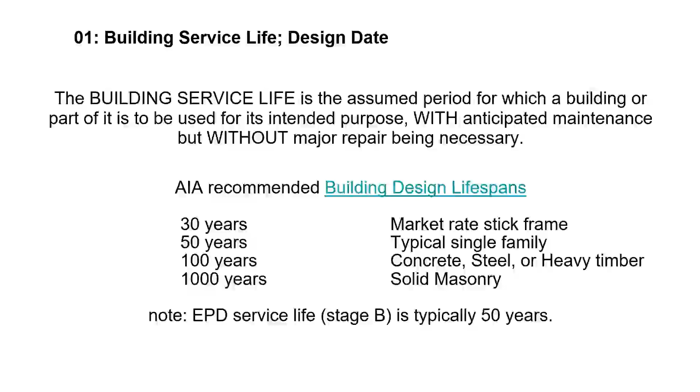Next, please. And in the form, item 1 is the building design service life and design date.

So next, please. The goal of step 2 is to understand at the most granular level possible which climate-related and other hazard risks are most likely to impact your project during its service life.

Many jurisdictions have local hazard mitigation plans or disaster risk management plans that will tell you what the local climate-related hazards are. In California, these are typically available at the regional, state, county, and municipality levels.

Also in California, all our municipalities are required by state law to have a climate change action plan, and that will definitely include projected climate change hazards in that municipality. Local utility districts, transportation authorities, and even school districts often have their own plans as well.

Many of these plans have been legally adopted by local authorities having jurisdiction, so they're actually part of project code compliance. Sometimes building officials are unaware that these plans contain legally required resilience and adaptation features, but that doesn't relieve us as building professionals of the responsibility to know what these requirements are and to design to meet them.

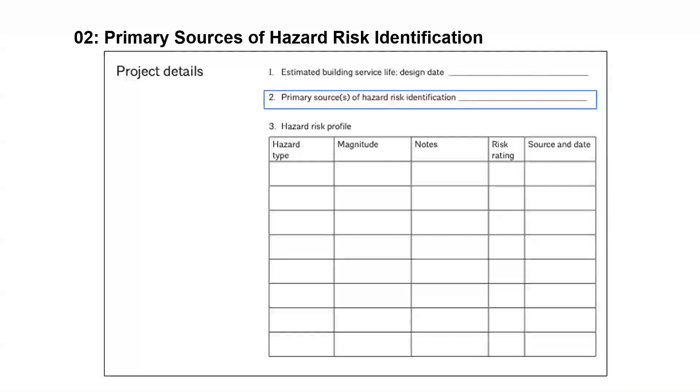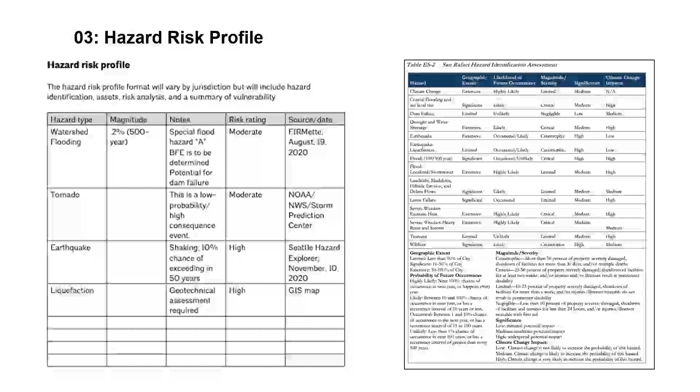Next, please. The AIA guide lists the natural and human-caused hazards to identify for your project, which include but aren't limited to atmospheric, climate change, geologic, technological and anthropogenic, and biological and pathogenic.

Local hazard mitigation plans typically also include the following information: scenario associated with each risk, for example, 500-year flood, probability of the future hazard event occurring, more about statistical probability in a minute, expected frequency of a given hazard event, guidance on the impact or consequences to your project, including cascading effects, the risk rating.

This summarizes the vulnerability by ranking the hazards according to impact, probability, warning time, duration, and cascading effects, and the source and date of the documents that provided this information to the plan. For example, an IPCC report, NOAA, state data, etc.

The resources hyperlinked in the AIA guide are helpful to use in addition to these local plans. They may identify a very real hazard that isn't reflected in local plans. Extreme heat is the one I most often see omitted from local plans, even though most of the United States is already experiencing this, not next century or next year, but now.

The key point is, local hazard mitigation plans provide excellent information on climate-related risks, but as a design professional, you also need to leverage other science-based tools. And unless your project is in a polar region, you probably should design it to accommodate extreme heat. Next, please.

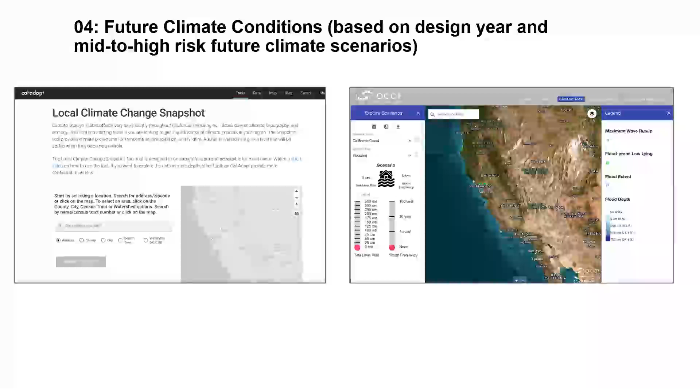On the left, a resource from the State of California, CalAdapt, which covers a number of climate change impacts. On the right, Our Coast, Our Future, which maps sea level rise at a granular level along all of the coast. The key point here is, as a design professional, you need to know how the climate is likely to change over the course of your project's design service life.

In the form, item 4 is future climate conditions.

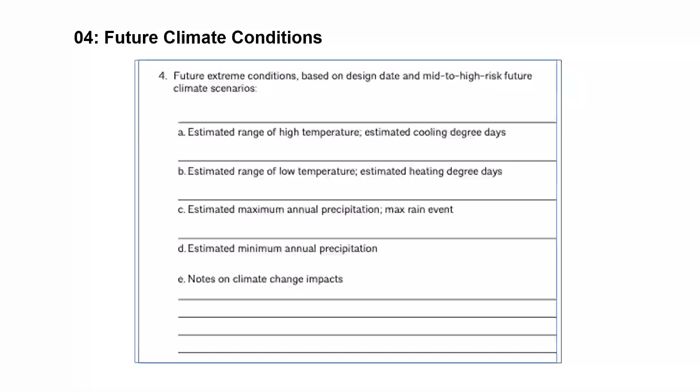We want to emphasize that you should make clear to your client they've been told what the project climate risks are. If AHJs don't require design and construction to adapt to the future climate, and your client decides to ignore future climate because the code doesn't require them to build to it, you want to be on record that you warned them of potential issues.

In the form, item 5 is the project resilience performance requirements.

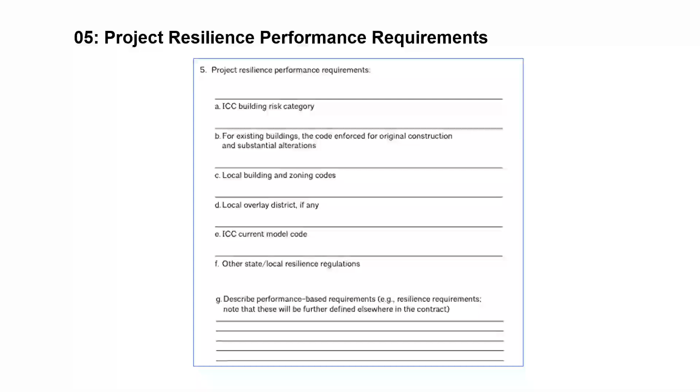The next item in the form is project team acknowledgements. Here, everyone on the project team signs to show that they participated in the risk assessment and understand implications to the project.

Item 7 is just additional notes you can add in your form.

Now Erin will show us how to talk with clients about resilient design strategies and establish priorities to address the risks you identified with the guide.

Thanks, Gail. Now that Gail has shared the AIA tool, I will take some time to briefly share how we at David Baker Architects are approaching these conversations with clients in terms of tone, timing, and our process to set and track these project-specific priorities and mitigation strategies.

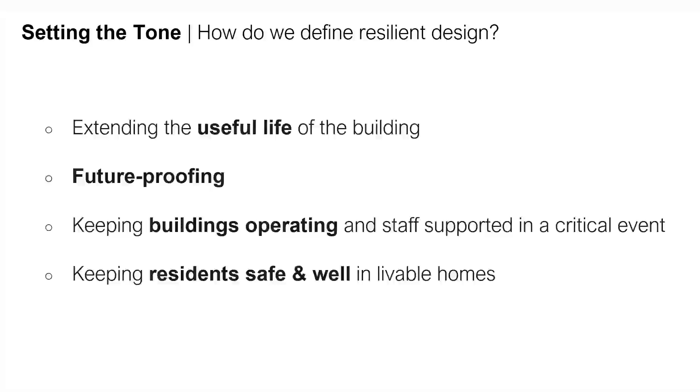This is really an opportunity to find values alignment with clients that's going to support key decisions and investments to create resilience, which you want to establish as early on in the project process as possible. In our office, we're doing a lot of housing, so we like to talk about this in terms of people and operations and things that are really relatable for clients about their buildings.

It's really important to talk about these resilience issues as early as possible, and then to continue these conversations throughout the design process. We're often handed sites and programs that we make the best of as architects. So I think the challenge to us is to find more opportunities to be involved as early as possible in feasibility studies and site analyses when we can, and make sure those analyses are happening right up front, that you're talking early on about mitigation strategies, and able to track that through into design decisions, consultant coordination, getting those into bid documents, and then making sure those are realized throughout construction.

Any project is going to have unique strengths and vulnerabilities. Gail talked a lot about that process in terms of the AIA form, but just making sure you are using data, science-driven, future-looking data, and maps as local as possible, just to reiterate Gail's points, that helps prioritize these risks and align on the goals with clients, and make sure you're giving visibility to all of that.

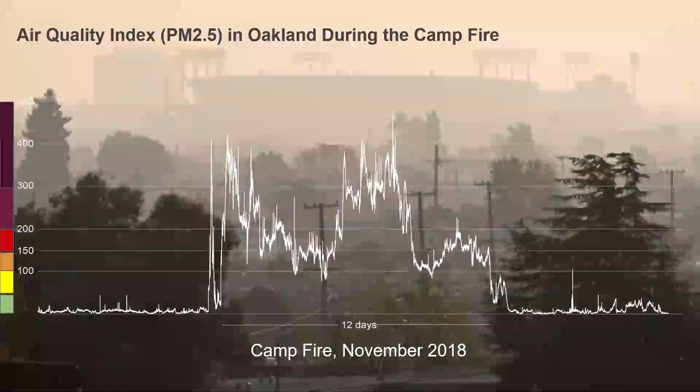Often we find that clients have a really strong desire to prioritize whatever events are most fresh in their mind, so they're looking to recent experiences. For example, the Orange Sky Days that we had in 2018 following the Camp Fire, every client meeting people were talking about air filtration, and then that goes away for a while and people aren't asking for it as much. Fire resilience in California is likely going to be the buzzword for the rest of this year. But we want to make sure we're not just reacting from an emotional standpoint about the most recent, and definitely not looking just to past data, but really looking ahead and having those conversations about likelihood.

Which is why the process of mapping vulnerabilities is really critical. There's so many resources out there. I think Gail did a good job of sort of simplifying that, but there's really tons of information, tons of data out there, and the goal is to find reputable sources that are as site-specific and future-looking as possible, to get beyond those sort of personal, emotional experiences.

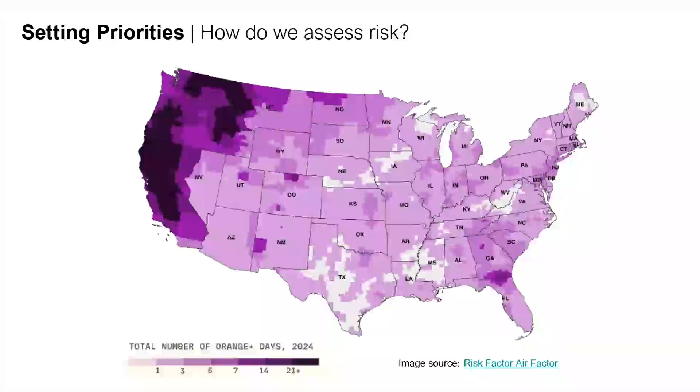Because there are so many resources, I've been part of a group through the Building Green Peer Networks that's been working to collect a crowdsourced centralized database of resources. We have been in conversations with AIA to figure out hosting and maintaining this long term. But right now it's just all of us putting the things out there that we are finding and vetting them as a group. This is available via the link that's posted here. There are location tags, there are types of hazard tags, so it can be a helpful way to sort of crowdsource and share ways to get more local data.

Here's a link to add to that database if you're interested. If you have something that you're not seeing on there that you're personally using, we are still in the crowdsourcing phase trying to grow this database to help people find the most local resources available.

As you begin these conversations, just a reminder that it's important to establish the scale of the resilience measures that you're trying to achieve with the client. For us, in housing, we're focusing on what are we trying to do at a resident level, a common area level, and then would there be opportunities to connect beyond the site?

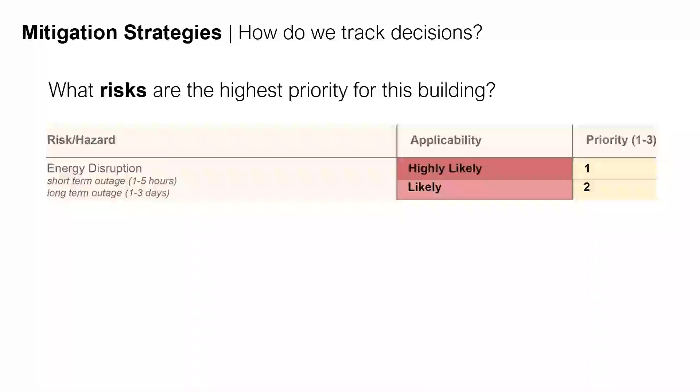Before this AIA form came out, we had been developing a matrix that's helpful to facilitate and track these conversations around likelihood and priorities, which could also be done with the form, but just that concept that you're documenting and sort of establishing that up front.

Whatever documentation you're using, it's a central and shared location for the project team to track the status. As these conversations go on over the life of the project, you're able to say what's included, what's under consideration, what's not included, and have some notes about what you're doing to address the prioritized risk.

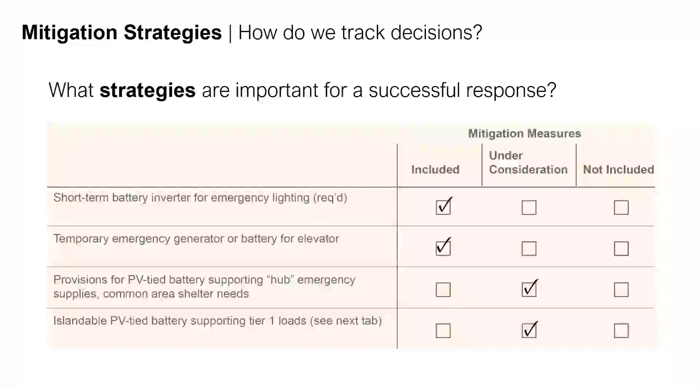One of the most important things we've been learning in our conversations with clients is that they're really the most productive when you talk about resilience in terms of human experience, needs, and behaviors, and it takes the big picture idea and makes it much more relatable, especially as you start to talk to service providers and maintenance staff, talking to them about their experiences and their needs, and the needs of the people they're working with really makes this a much more relatable conversation.

It can also be really helpful to track the various incentives. There are some out there right now, and more being developed, but ways that can reinforce funding applications and insurance, and there's going to be more case studies that talk about that as well. That is all for me. Thank you.

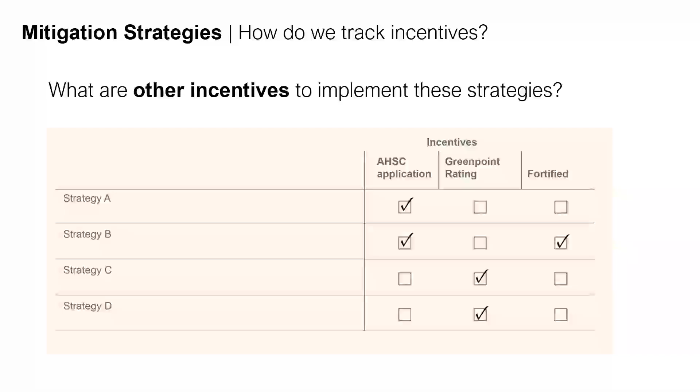Hi, everyone. I'm going to give a brief run through of the Resilience Design Toolkit, which HKS co-published with AIA National and collaborated with the AIA RAD-AG. As noted, our team gave a full presentation on this as the first part of the series, so I'll do my best to give a brief summary. I just put a link in the chat if you would like to follow along.

As most of us know, the building code represents the minimum performance requirements a project must have to be built, and it seeks to provide a building that protects the health, safety, and well-being of users in hazard egress events, but does not ensure the building or structure will be usable after the event. A beyond code building must look to the future and anticipate potential changes in social behavior, technology, and climate to enable the building to remain relevant and safe over time.

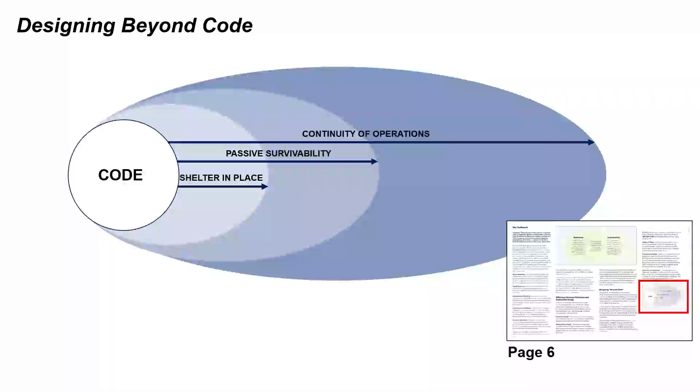So resilient architecture focuses on creating buildings and urban spaces that can continue to function and provide essential services during and after disaster events. So how do we get there?

Our team developed the 5 forms of resilience to communicate a comprehensive approach for resilience thinking, which includes social, health, economic, infrastructure, and environmental resilience. Together, these concepts provide a framework to assess the level of resilience of a place and reveal potential gaps where attention is needed.

The toolkit was developed through internal research and the evaluation of the wide breadth of tools, processes, and rating systems available to inspire resilience in the built environment. There are plenty of tools out there, but none truly address the architecture design process in detail. So we created our own and specifically crafted it for architects, interior, and urban designers.

The 5-step method embraces the standard approach for architecture projects used in the AEC industry, which allows the process to be flexible, agile, and able to accommodate any type of project.

So where do we start? Step 1 in designing for resilience is to define the resilience scope of the project. This may already be embedded in an RFP, RFQ, or it may stem from a conversation or meetings with clients and stakeholders. During your interactions, you will likely notice the knowledge level regarding resilience of a client, and that can help determine how to continue.

Step 3 is all about identifying the hazards pertinent to the site and project and how to assess their impacts. The key component of determining risk and vulnerability is exposure. We use the probability of hazards occurring and the magnitude of losses from those hazards to calculate the risk, and we can do this through the formation of hazard asset pairings.

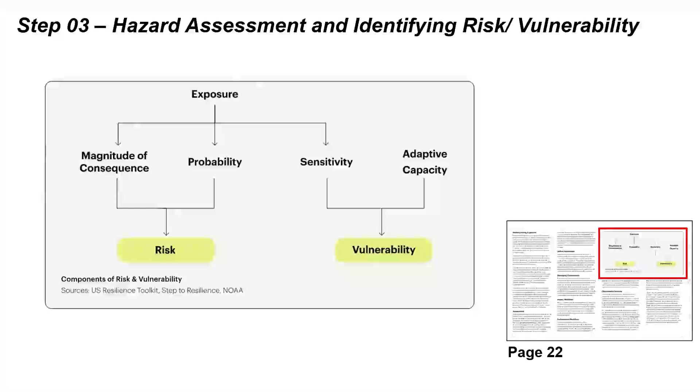Here we assess potential hazards that Gail brought up for the site and the associated impacts of the project assets. This process reveals which hazards are most important to account for in the design.

Once a hazard has been identified as a potential threat to the project, we then analyze it to determine its critical impacts. This chart shows how we consider the hazard's primary and secondary impacts to the site, building, people, and surrounding areas to identify key components for the project team to develop solutions for our next step.

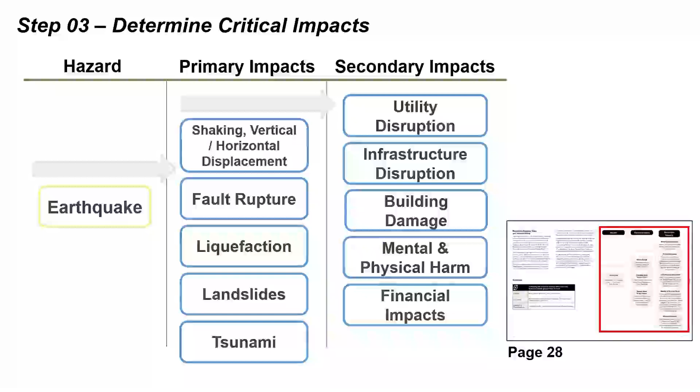Step 4 is where hazard assessment results from step 3 come in and connect them to design strategies of the project. During all this, there's a lot of information to consider, so it's really beneficial to incorporate the AIA framework for design excellence into the design process to help coordinate concepts across all 10 measures.

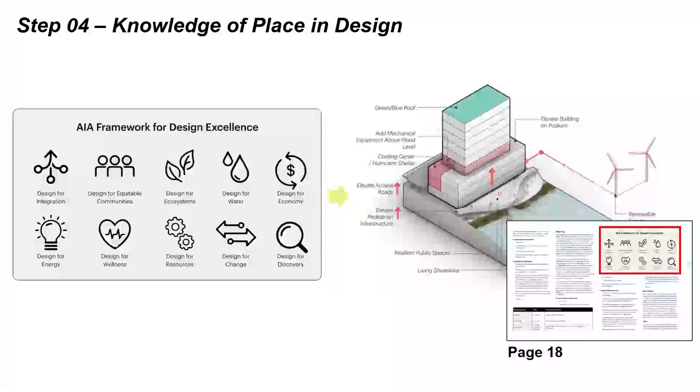Approaching holistic and comprehensive ideas for effective resilience is really important and requires a multifaceted approach. While developing solutions, you should consider these 10 topics important.

Integrating resilience strategies into a project relies on the use of a design integration feedback loop to develop design strategies, assess them with a benefit cost analysis, and then add them to a list of feasible options. During this, the team would repeat this process until the benefit cost ratio yields a positive performance, which we'll go through a little bit.

Here are the 5 steps to a benefit cost analysis, which evaluates the benefit of a solution against the cost to implement it. Up until right now, we have completed the first 4 steps, and then we will calculate the benefit cost ratio to determine the effectiveness.

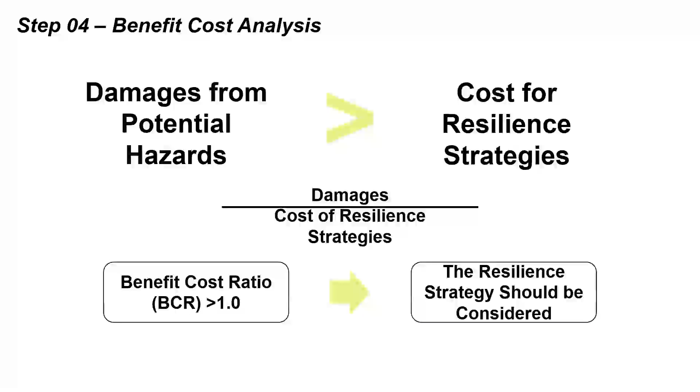If the benefit cost ratio is above 1, through all the math of it, it's an effective solution. The BCR should be balanced by feasibility, defined by the ability to incorporate the solution in the design and uphold the design intent.

The final step focuses on the relationship with your client and the performance of the building and how it all comes together. After the project is complete, you'll want to maintain the relationship with your client to evaluate your design. After a disaster, you should follow up, see how everything held up, and how your team can assist. Both will inform you on solutions and innovations for other projects down the line.

Another way you can always support communities in disaster events is to participate in the safety assessment programs that AIA hosts. So now I will pass it over to my colleague, Sammy Shams, to share a project we used the toolkit on. Thank you, Amanda.

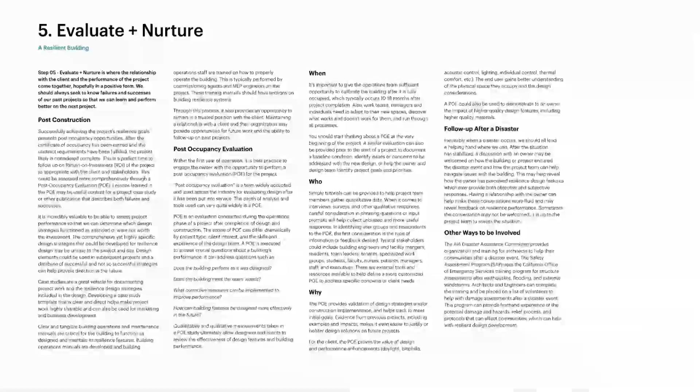So today I'm going to talk about the Wesley Chapel campus with the Johns Hopkins All Children's Hospital based in St. Petersburg, Florida. Real brief on this one, we did a master plan for this group last year, and we did a resilience assessment with that.

This campus is a new community hospital based in Wesley Chapel, and we'll have a large facility there. This is also a project that has gone through Hurricanes Helene and Milton this past year, which have influenced some of the process here.

Today we'll really get into the nuts and bolts of this process and build upon what Amanda, Aaron, and Gail have said earlier with these toolkits and resilience design.

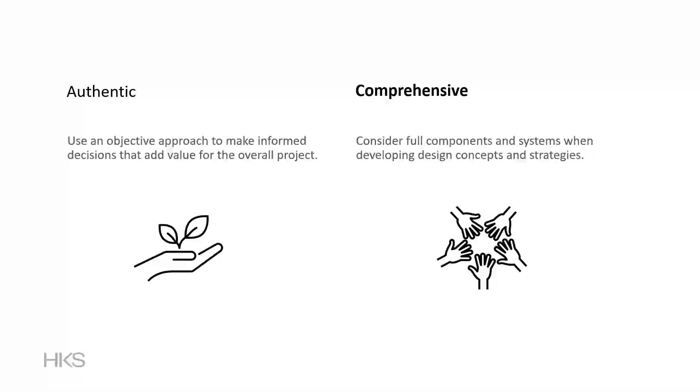First off, we always want to be authentic and comprehensive in our approach to resilience and sustainability, finding ways to be pragmatic and finding the true value of designs. That's what we're trying to do here with these types of projects.

At HKS, we developed this whole way of talking about this with our product called BEEPERS—the thing that put you on your belt back in the 80s and 90s—but here it stands for building performance, resilience, sustainability, how they work together to increase the resilience and sustainability of our projects using building performance.

Through this process, we use tools to help make this come together and be succinct, streamlining the approaches with owner's project requirements, where we ask the client about different topics they want to include in their project—what are their goals, what are the requirements that need to be in the project. Doing this at the beginning of the validation period of design and concept design, we can use an assessment rubric to then assess these criteria and objectives with an objective approach in the design process.

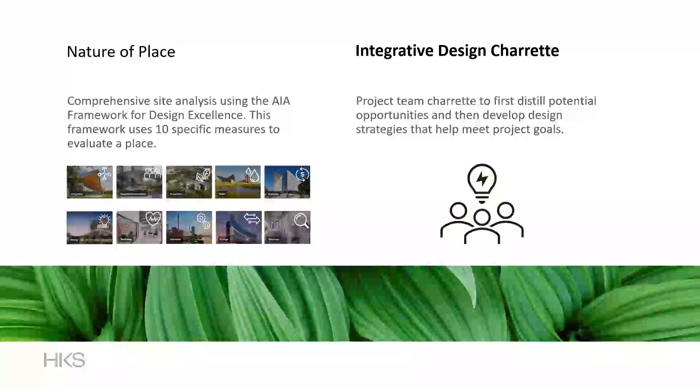As Amanda mentioned before, we do nature of place using the framework for design excellence, using these 10 specific measures to evaluate the place. We put this into an integrative design charrette to have these conversations and develop the ideas and strategies in design.

Along the way, we can incorporate green building certifications, as Amanda mentioned before, the toolkit that includes some resilience pieces in the design part. This all leads to a high value design—we're increasing resilience, increasing sustainability, and adding performance to the project. So this is the overall approach, and now I'll get into the nuts and bolts of this project.

So this project, we started off in the validation period, understanding the site plan drivers. We had that initial OPR charrette with the client, and then we drilled into the nature of place, developed some concepts, and then started to evaluate them through the building performance lens we talked about before. This came into our schematic design period, which is actually going on right now, and the project is still in design and hopefully will be built in the next coming years.

As I mentioned before, we do the measures of design excellence and the nature of place, and we use these 10 areas to understand the site, the people, and the place.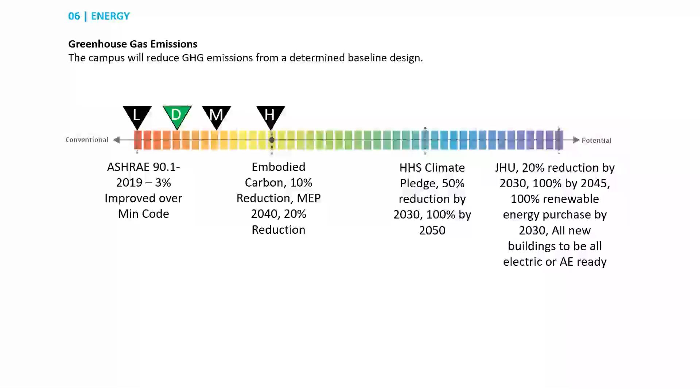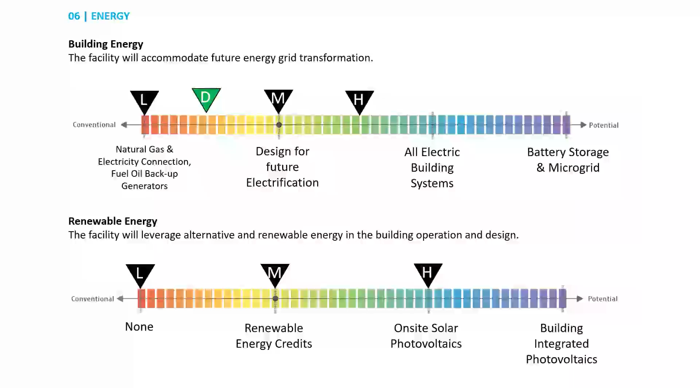Other measures look at building energy, like electrification, all-electric building systems, natural gas connections, and renewable energy. These are different examples of how we start these conversations, understand their goals and requirements, and impart those into the design process.

When we get into resilience, looking at ways to be more flexible in the building lifespan are key questions I ask the ownership team and project team. As a hospital, we want some acuity-adaptable rooms to accommodate pandemics and other emergencies that come up along the way. We also want the ability to accommodate patients from other campuses in case of a hurricane or storm.

Building lifespan is key as well — this will probably be a building that's there for a long time. We design them for 60 to 100 years, but it'll probably be there longer, so we want to understand that now, up front, at the beginning of the project.

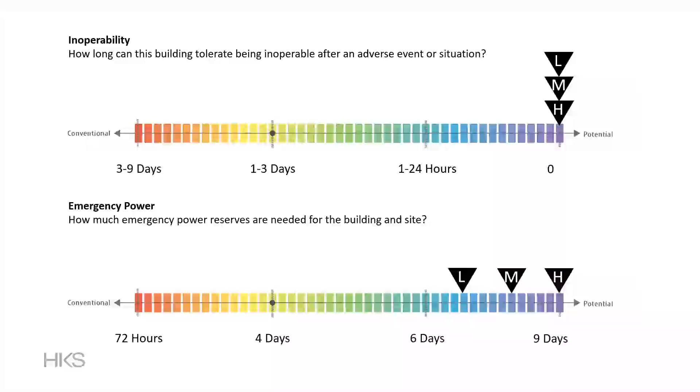We also talk about inoperability and emergency power. This is a critical facility, and the real answer for inoperability is zero, because this is going to be operational all the time. Emergency power is something we always think about and want to increase for projects, since we don't know future events that can influence the facility. So we've always had good conversations about what time period to use.

This process starts with the OPR assessment and charrette, and then we start developing the strategies and designs. Here's a snippet of a site plan for this project. The end goal of all this is to take these ideas and vet them objectively with the criteria and assessment rubric we have, using weighted averages and levels of performance to set goals and performance ratings.

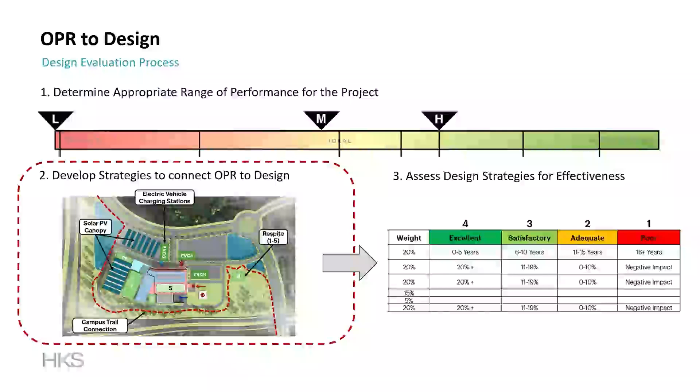Within this, we also set up priorities for the project for sustainability and resilience outside of the design priorities to help guide this process. So we want to make sure we use resources efficiently, enhance well-being, add some resiliency, and increase durability. Some of these will be more of a design development level idea, but we'll talk about them in expanded design as well.

Here's the process that we use to narrow down these strategies in the beginning. We want to use resource efficiency, site well-being, and resilience to capture the strategies, and then take them into the objective process that we have here.

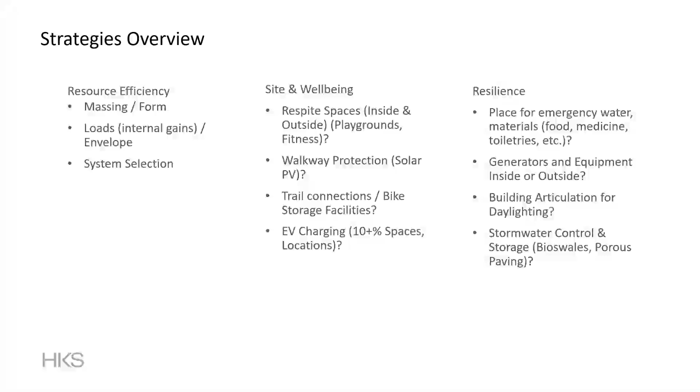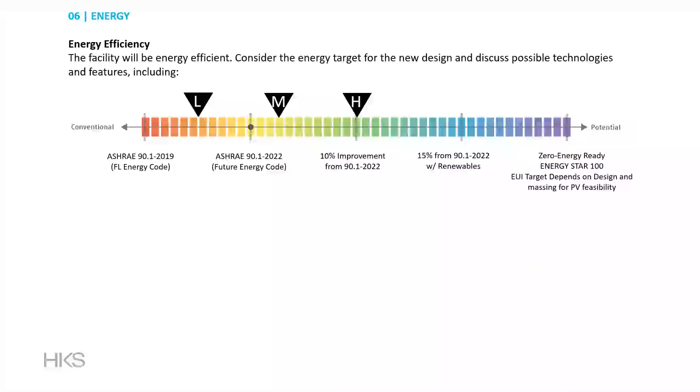Looking at the energy one again, we want it to be a bit better than ASHRAE 90.1-2022, which was a future energy code for this part of Florida, with a 10% improvement as a high goal.

This influenced the building form. We worked with our mechanical engineer SSR to develop ideas for form using the energy model, and the design team to understand how the patient rooms would flow with that. We used the access from the cooling loads to guide that study.

Then we found some energy reduction strategies. We used this waterfall diagram to understand what the Median Hospital is, what the current state facilities are, and what these different types of strategies could be to reduce energy consumption, using the OPR to guide some of those ideas moving forward. You can see the energy reduction and savings, and a summary of all those improvements for the project being on the high side.

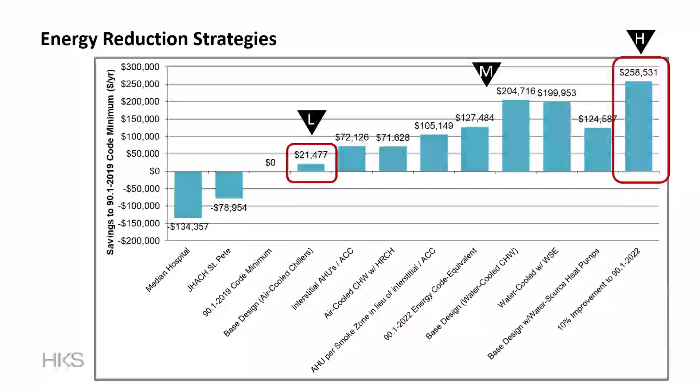Then we take those strategies and put them into the site plan. We added ideas for solar PV canopies over the garage and some parking, a campus trail for some wellness, EV charging stations, and respite areas.

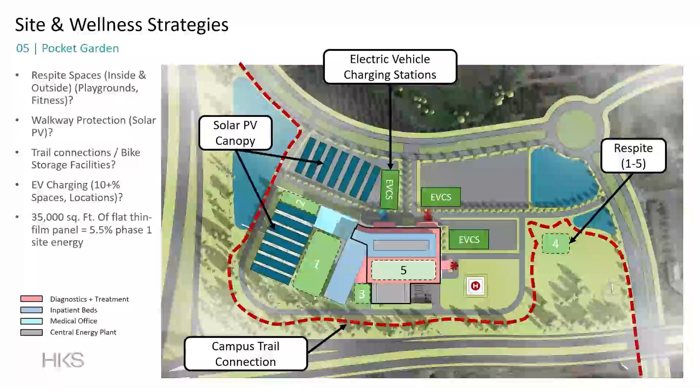Sorry, the PowerPoint has frozen. Let me see if I can stop sharing and then reshare. Oh, I might have pulled up all those arrows and didn't know we had those there. Oh, is that what's happening? Yeah, I didn't notice those either. Sorry about that.

That's my fault. So then we set up this rubric to assess these different strategies using criteria that we developed with the client. We have different types of strategies like economics, carbon, environmental, operational, the criteria there, and then the weighting to give priorities based on the values of the client. On the right-hand side in the colors, you see the performance of those strategies and where they would land on budget and cost. We developed the strategy to create a scoring system so we can compare them objectively.

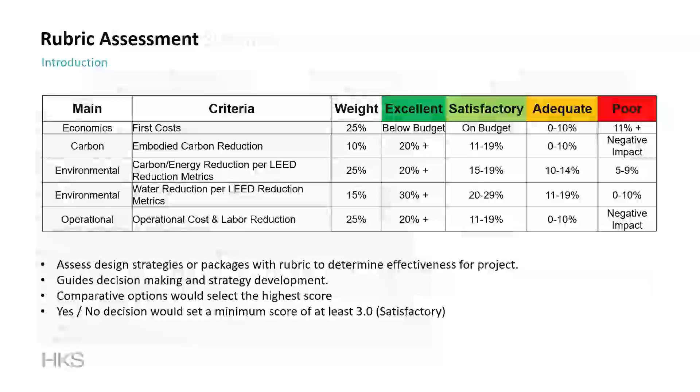Here are some of the strategies that came through the initial vetting process, and some of the scores that we have. We've taken these and organized them between resource efficiency, site and well-being, and organizing concepts. That's how we began to structure this process.

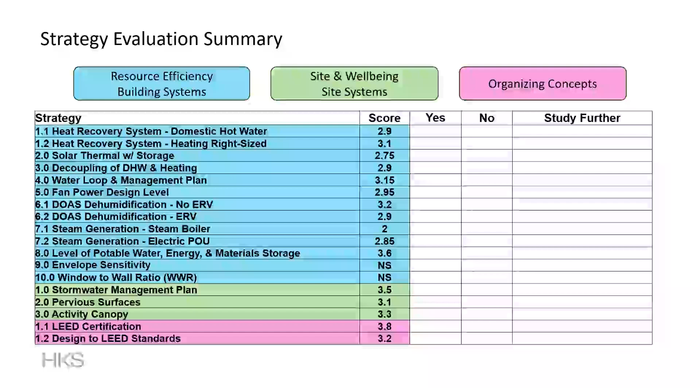The next part of this was to evaluate these strategies a little bit further. We looked at initial cost estimating for rough order of magnitude of cost, pros and cons, and notable characteristics.

This is for a few of them, applying the criteria objective assessment to these strategies and seeing what the scores were for each on the right-hand side.

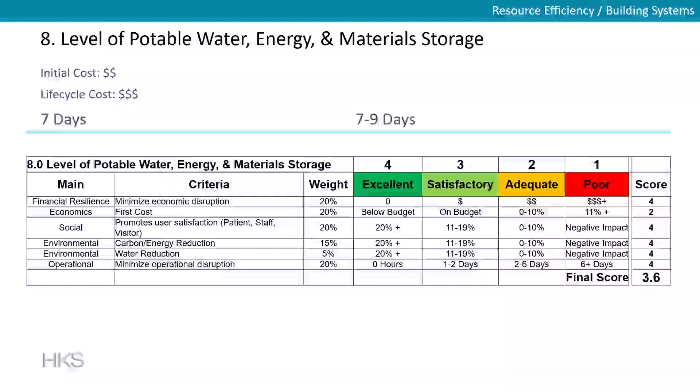Then we also go into some of these strategies further, understanding the one-line diagrams, the components of these, as well as the rough order of magnitude of costs.

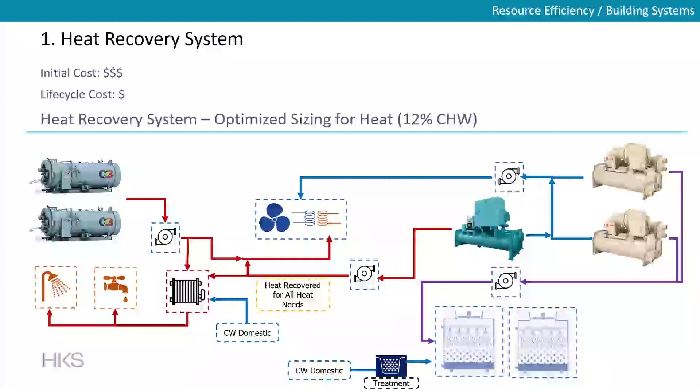Again, pros and cons, another example of the heat recovery system that also helps with energy and resilience.

Then also how that impacts the budget and the cost using the energy model. So now we're using building performance, resilience, and sustainability in the same mind frame to bring those all together.

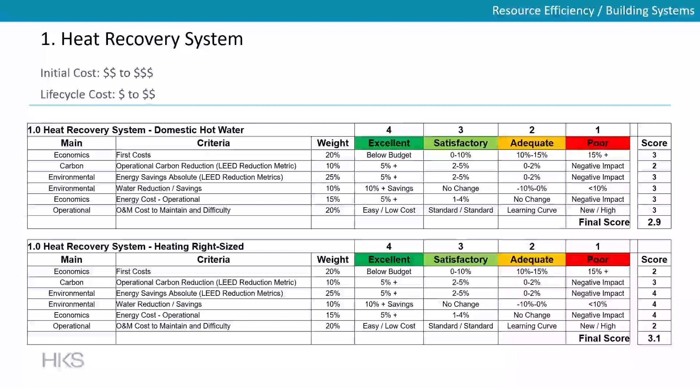Then we can compare different options within these strategies to understand strategic focuses for heat recovery systems, being just domestic hot water or a right-sized system for the whole campus, including some future growth.

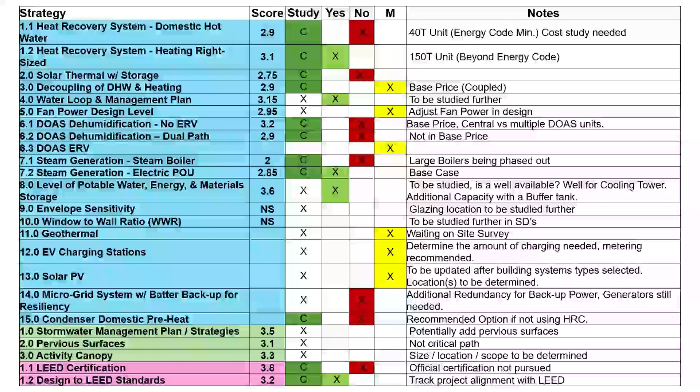Eventually we have a lot of strategies that we've studied, that we have decisions on with the client, to help give us a streamlined approach and direction on what to use. The ones considered yes are ones we take forward, the ones that are no, we take off the list and stop working on those. The ones that are maybe, we keep moving them forward. This is a larger list that we had for this project.

At the end of this, we capture all this information using an A3, where we look at the background of the project, the problem statement, the current state description of what's going on, the root cause of the evaluation and what the assumptions were, and then what the final results were. So we can document those decisions in design and help the client and the project team moving forward to know what was going on and be more efficient with it.

So I'll leave it here with this. This is just a very objective and technical approach, but an application of the Resilience Design Toolkit. We also want to preface that this is different for every project - this is just one way of doing it, and you'll see many different ways of doing this with future projects. This is a developing process that's agile and efficient and really wants to be what you want to make out of it, so you can change it however you want. But this is just one way of looking at it. I'll pass it on to the next person. Thank you.

Okay, I want to drill down a little bit and talk about another aspect of resiliency that impacts work that people working in affordable housing have to deal with, and it's specific to the convergence between climate resiliency and economic resiliency. So I'm Tim Coat. I work for National Community Renaissance. We're a developer builder of affordable housing, servicing mostly Southern California. We have some footprint in Texas, which is growing, footprint in Florida, which is also growing, but the case study here is going to be specific to what we're doing here in California.

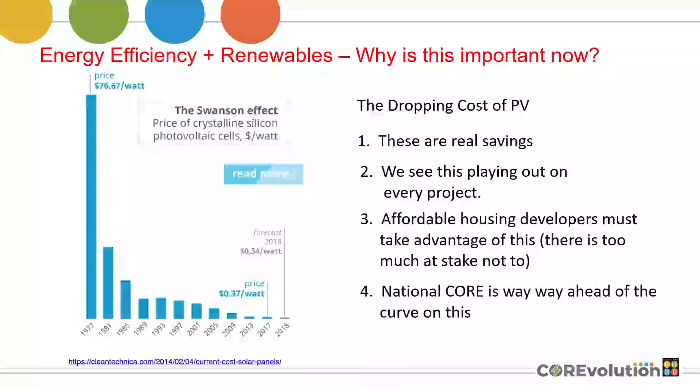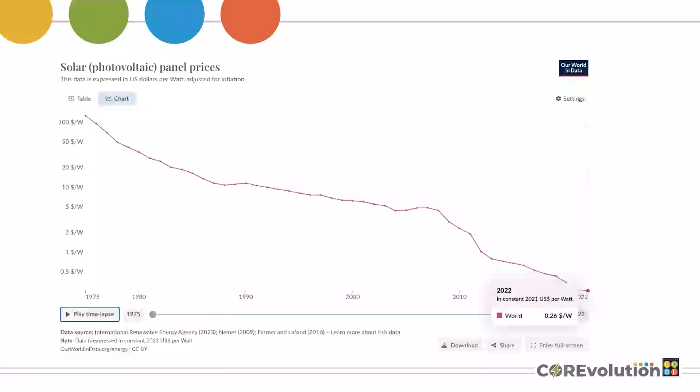This slide, the last one I could find from IRENA, is from 2022, but the cost continues to go down and will continue to go down. There'll be discussions of tariffs that could drive it up - the last time there were tariffs on Chinese panels we were nervous, but the market quickly stabilized and costs continued to drop. Labor costs are fixed, but we've hit grid parity - the point where it's cheaper to drop renewable energy onto your project than tie into the utility grid. We hit that point around 2018 and never looked back.

This is really important to us because we build a lot of affordable housing, including housing for the formerly homeless. We go deep into the long-term implications of operating these buildings, looking at incentives available and the competing costs of electricity from the utility grid. This is Greenbrier Village, an example of 51 units of housing for the formerly homeless down in Oceanside.

We finished this one earlier this year - you can see the layout on the left and it in process on the right. We were leveraging SOMAH, Solar on Multifamily Affordable Housing, and SGIP on this one to bring the cost of solar down to zero for us as an affordable housing developer. We get into solar service agreements with partners - we work primarily with Sunrun, who brings us federal tax credits, 50% tax credits, SOMAH rebates, and sells renewable energy credits. So the cost for solar on our buildings is zero.

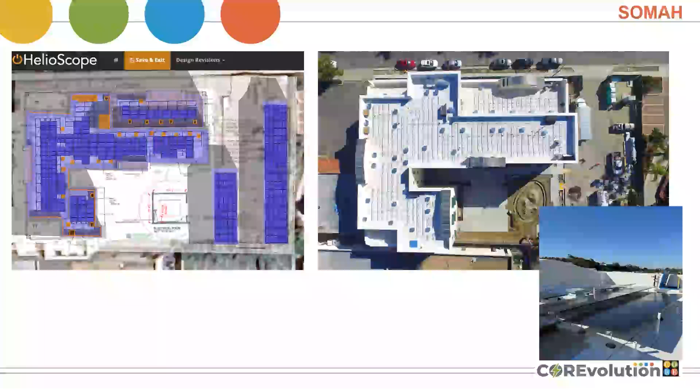And we don't own it - we're essentially leasing it long-term. So if it breaks, somebody else has to fix it, Sunrun in this case, and if they don't fix it they pay us a penalty - a performance guarantee lies on each of these projects. So zero dollars, zero cents per kilowatt hour is our rate for electricity on this, and that's important when we look at the operational economics.

This is the analysis I go through - I immediately take energy analysis and energy modeling directly into an economic tool. I use Energy Toolbase, which allows us to identify the upfront costs, and the shot on the right shows the avoided cost of utilities.

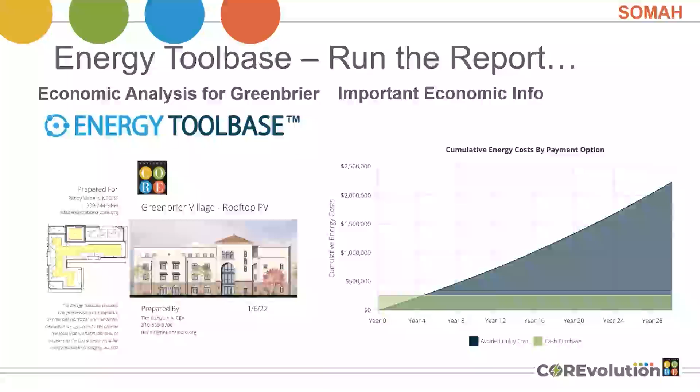I threw in a 30-year conventional loan and showed that the project's going to get to about 80-90% of what it needs with renewable energy on site, but our long-term operational savings are going to be in excess of $2 million. That's a big deal for a 51-unit project housing the formerly homeless - these things operate on shoestring budgets.

Shifting slightly, it's not just economic resilience, we're also interested in climate resilience. So what we do in our process is, for these communities, build in some place where residents can go in the event of an emergency - the utility grid goes down for whatever reason, a catastrophic fire, an earthquake, or something like that. This is a diagram of where the community room is at Greenbrier Village.

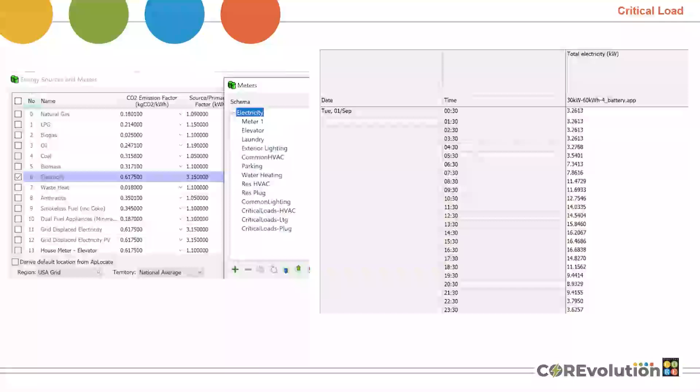In the energy modeling process, you can see the middle shot - I've identified a whole bunch of utility meters inside my energy analysis tool, which is IES VE. The shot on the right identifies the worst day for energy performance and how many kilowatt hours I'm going to need out there, so I can start to think about how big the battery needs to be.

If I look at that energy curve for that worst day, I can see that my peak demand out here is going to be hovering around 17 kilowatts for those critical load areas - the community room, the offices.

I only want a battery that's going to service those spaces. In an emergency, residents will go into those spaces. They have some place to put their medicine, a refrigerator that's on, some place to plug in their cell phones, and the air conditioner operating. All I want to do is size the battery to get me through 4 or 5 hours in the evening, when residents can then go home and open the windows and hunker down.

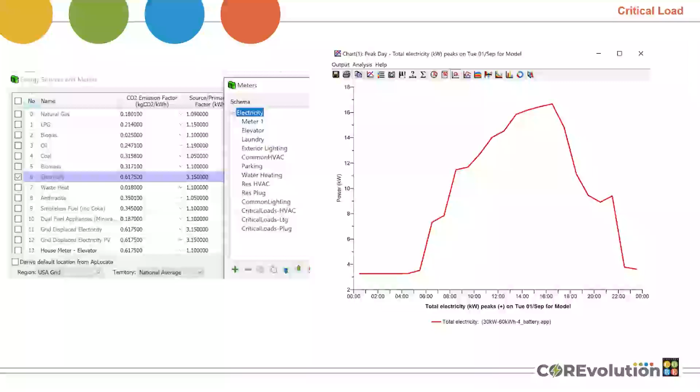So the analysis here for us from this end is: how much battery do I need? There's rebates out there that are going to get me the battery for free. And how am I going to get through the evening hours?

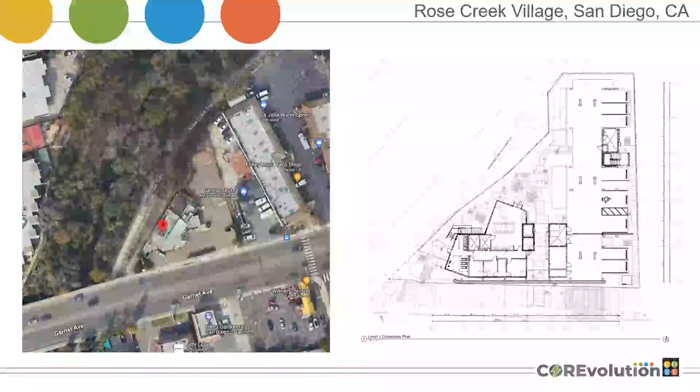Take this idea, and if we can leverage it for new construction projects. This is a similar project, Rose Creek Village Villas, 60 units of housing for the formerly homeless, also in San Diego. You can see there's no surface parking here, no room for carports, just a couple of parking spaces.

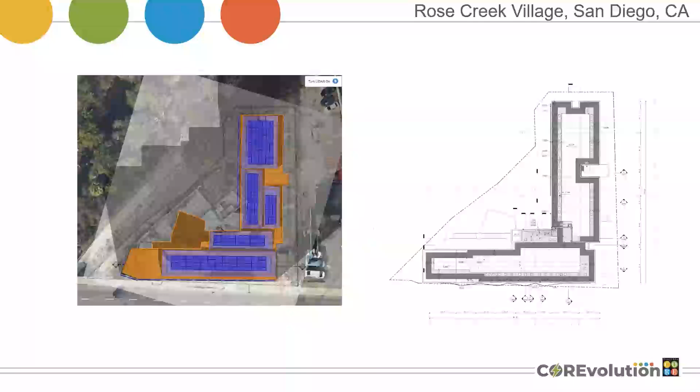So the diagram on the left is what we would typically do: give me some rooftop solar. But it's a 5-story building, and I'm only going to get about 40 to 50 percent of my total energy needs from the rooftop. And the solar for us is free. So what do we need to do next to create greater climate resiliency?

I do the analysis, and SOMAH and SCHIP are going to pay for my solar as long as it generates electricity — it's free to me. So I jump in and give this diagram to our architects, in this case Studio E down in San Diego, and I say, we want something like this. Can you give me something like this to create greater economic stability and resiliency for us?

And in the hands of the right architect, they make something that looks truly spectacular, going above and beyond what normal people's expectations are.

Performance of this: you can see in the early months that low sun is hitting that facade solar pretty hard — we're generating a lot of electricity, throwing it into the grid. We're using NEM 2 tariffs because we're affordable housing, so we get to export at about 20 to 25 cents a kilowatt hour. And in the summertime when it's high, rooftop solar and some oblique angle sun hits the facade solar.

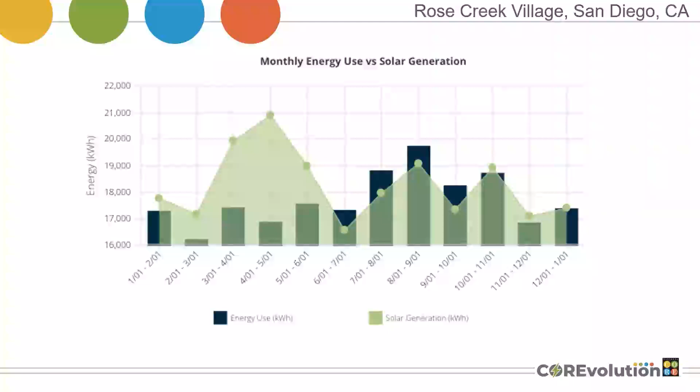And then operationally, here's what it looks like — ties right into it. $127,000 based on today's cost to operate this building.

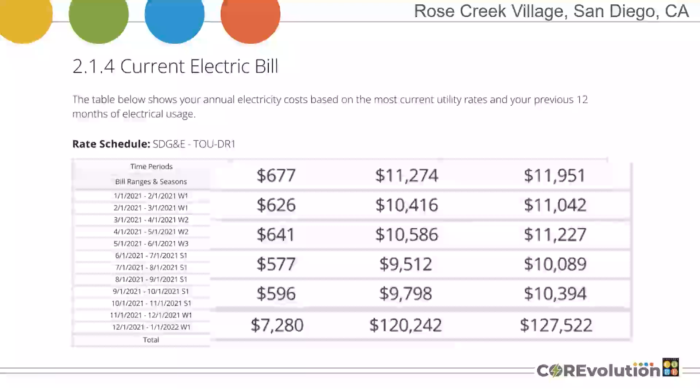And when we're done with this and we add the facade solar and the rooftop solar, we get our operating costs down to about $4,000 a year.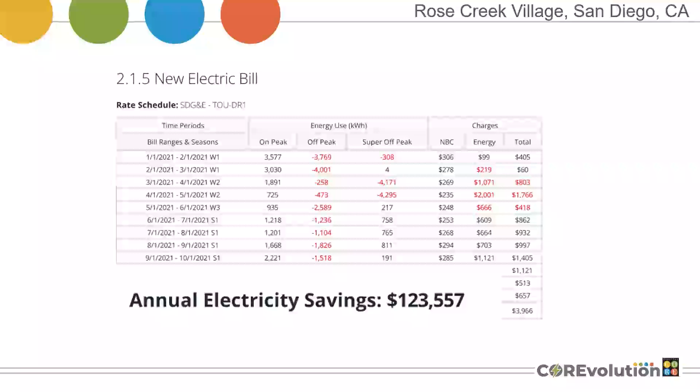So that's $123,000 a year in savings. And most importantly for us, because we're operating affordable housing for a long period of time — what does this look like over just 15 years, the 15-year life of a tax credit relationship? That's $1.8 million based on today's utility rates and avoided utility costs.

This is where the money hits the decision making. This is driving design conversation up front, creating greater resiliency operationally for us — building in other things like the battery storage that's going to service the community room and the offices in the event of a power outage or something like that. But more than anything, we get to a different type of architecture that speaks the language of resiliency.

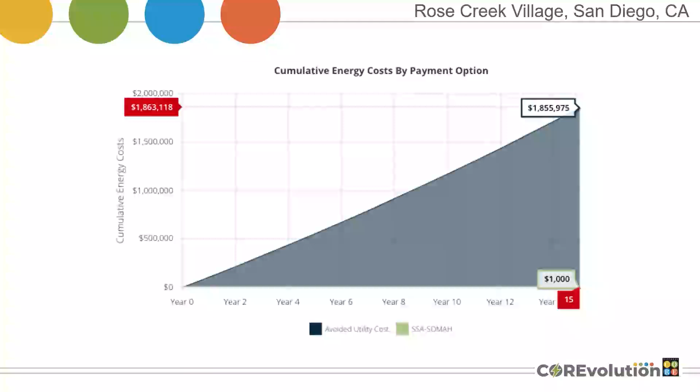And to steal a line from Eric Naslund from Studio E, he calls this an architecture of hope, which is really important in the climate we're living in now. I think with the climate crisis and the political landscape we're living in, it's really important to keep an eye on this stuff, because I'm convinced that economics will carry the day.

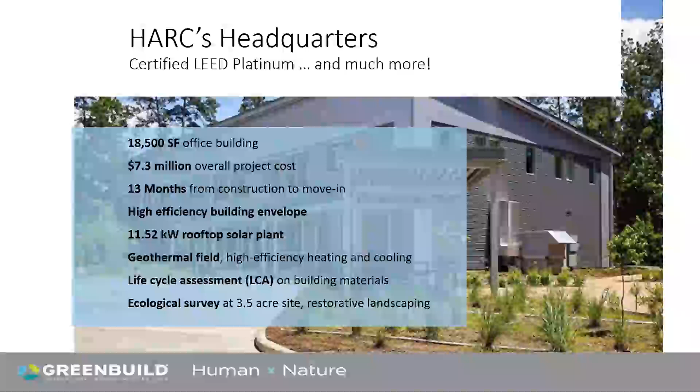So it took a team approach with a client who was definitely aligned, and you can see in the OPR, from day one, much of the sustainability goals obviously have come to very much support the resiliency goals.

This project, in terms of measures of success as a not-for-profit, part of the measure of success was not only a cost-effective delivery, but an operational optimization that would reduce the cost of energy, the cost of water, the cost of maintenance through the right choice of everything from orientation, future solar photovoltaics, which did come about, site stewardship, daylight, things you've heard already. But this was from the very beginning.

This allowed us to create, in an early partnership with the contractor, Brookstone, to basically truly value engineer and prioritize what would make sense as initial schematic design to align with the budget and align with the owner's needs. From the very beginning, certification, third-party certification was a nice to have.

It is a LEED Platinum building, but in fact, what we were very much focusing on was true performance measurements, indicators that we agreed upon early, the EUIs, the durability of facade, and I will come back to the importance of the enclosure, days in operation.

One of the biggest issues we face with resilience that folks have noted previously, we're not facing, but for the challenge, say, of the wildfires where destruction occurs, our challenges, except perhaps along the coast, are interruptions of business, interruptions of quality of life. Can't get kids to school, therefore suffering education. But the conundrum tends to be an interruption rather than the end of property, end of life.

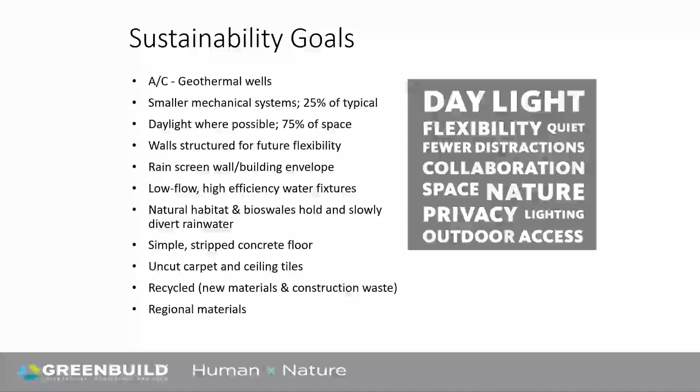So one of the main measurements was how can this be a good place to work regardless of what's happening with climate, with weather, et cetera.

Next slide. Obviously, as a small organization, they're very much focusing on how they could right size. And so, in fact, from a previous firm's programming design, we reduced the size of the building by almost 25%, right sizing it. The building is surrounded by the woodlands, or the woods of the woodlands.

This site has been historically both tree harvesting, oil drilling, cattle raising, mineral culling, and surprisingly explosion element testing for oil and gas. So it's had quite an interesting site.

From the beginning, the restoration of what still is indigenous, what is basically prairie and northern prairie woodlands of this part of Houston. Houston has quite the diverse geography, topography, geology.

Was very important. And so all that was rainwater and other things connected to our natural hydrology was not used in the building, but rather to restore and maintain this campus.

Even with our droughts, this appropriately indigenous or autochthonous landscape, overhead, ground cover, middle story, is thriving. The water from the fixtures is not used here. That would have involved an amazingly complex code requirement.

However, what we did, of course, use is reduce and kind of limit the quantity of water used in the fixtures, et cetera. So the water story is kind of a quiet one, but in fact, it's really the power and the resilient power story that's the question here.

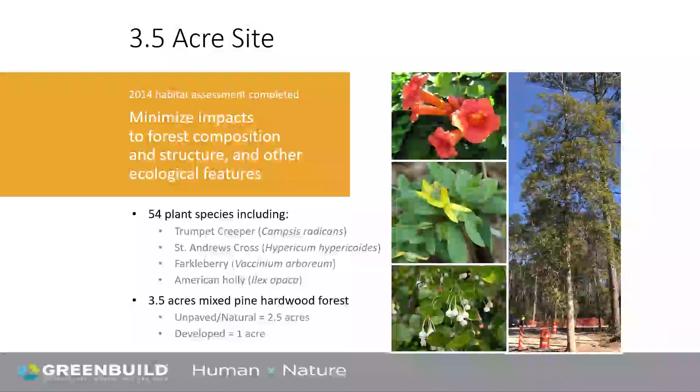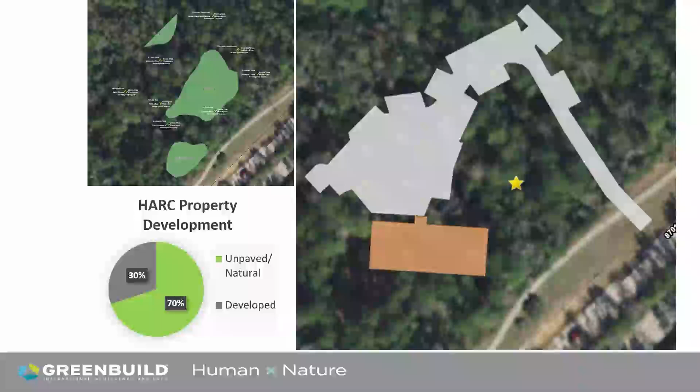The idea of maintaining as much permeable and natural surface as possible for that regeneration, even if it meant a kind of circuitous route to get in. We minimized or reduced the impact of the facilities and parking on champion trees, historic trees, and historic woodland areas, and included, as you see in the upper left-hand side, an assessment of what was sensitive habitat. We did our best to thread the needle here.

So just finally, before the big summary, the building envelope—this is a rain screen technology that frankly should be universal in application. Somewhat challenging when you look at the actual insulation and its flammable or fire issues internally. It's something that, were we to do this again, we'd probably look closely at that Dow Thermax insulation. It does meet the standards, but could we be better, both in terms of hot embers or otherwise for fire?

Nonetheless, what this does is create a thermal break. In the blower door test, this building is about two times the passive house requirements in terms of tightness, which means our hot, humid air full of mold, mildew, dust, etc. does not find its way into the building, with all the major entries having vestibules. It also means the hot Galvalume does not translate its heat into the building, and that little air chimney helps cool the Galvalume and keep the building tight.

And as such, we dramatically reduced the air exchange. Well, we changed the air, but we reduced dramatically the amount of energy needed to dehumidify, as well as change the air, using the geothermal heat pump approach to pre-treat the air, as well as using enthalpy exchange as we release the air. So a combination of an extremely tight envelope, very resilient, withstanding the threats I've mentioned from too much rain, hurricanes, derechos, and so forth, as well as taking care of the extended over-100-degree days.

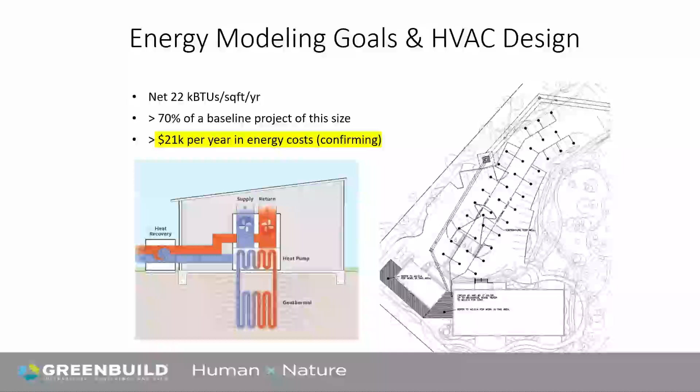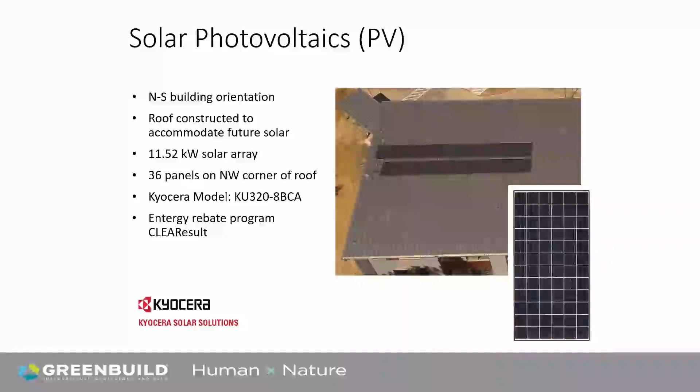I'm watching the time, so I'll skip the next couple. If we go to the next one, that's the original PV array. It's now more than tripled, again through a partnership and rebate program that over the last 4 years of the Biden administration has been very helpful, even here in Texas, with some great partners.

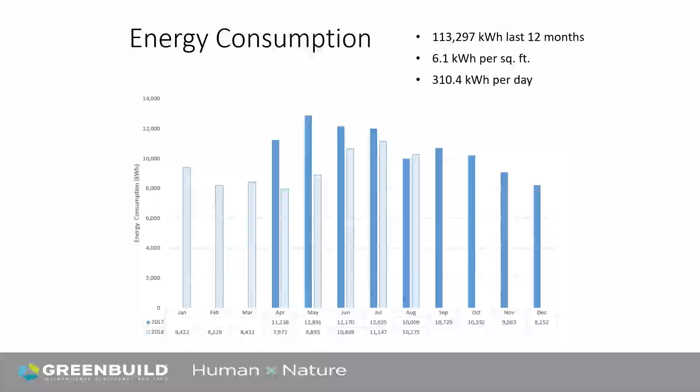You can see the dramatic reduction, not only of the demand of the energy, and that PV partnership has increased since this slide was delivered about 5 years ago.

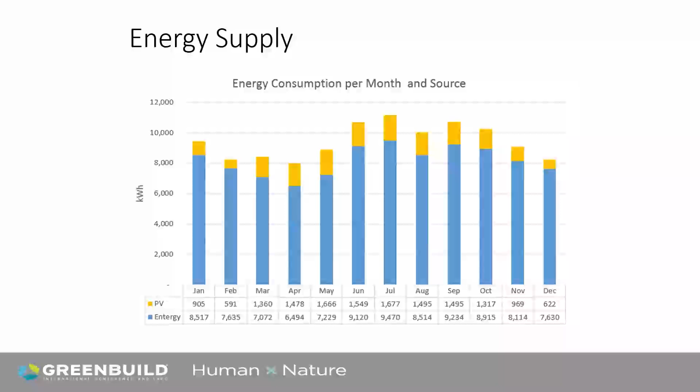I've said it repeatedly, lots and lots of assessment tools on their part. Their organization, as a research organization, has been hired by county, city, regional organizations to look at facilities, to coach their own facility teams. So in some ways they are coaches through their own building of other successful projects in the public realm and a few private realm.

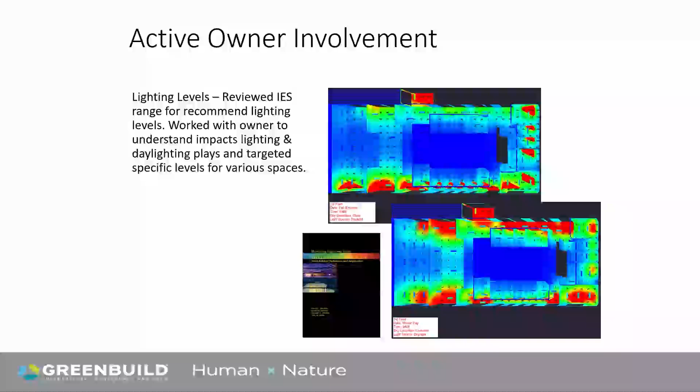A lot of our corporate campus facility folks at the launch of projects have come to visit this small but nonetheless impactful project about lessons learned, which there's been many.

A lot of publications. CMTA, the engineers, have continued to do research and commissioning with them to optimize. It's now a LEED Zero certified project. It continues to look at other opportunities for resilience certifications, particularly as it moves to look at battery technology, not to be totally off grid, but to be less grid dependent, particularly on the challenging times when ERCOT says our power is about to have problems on the grid across Texas, the independent Texas grid.

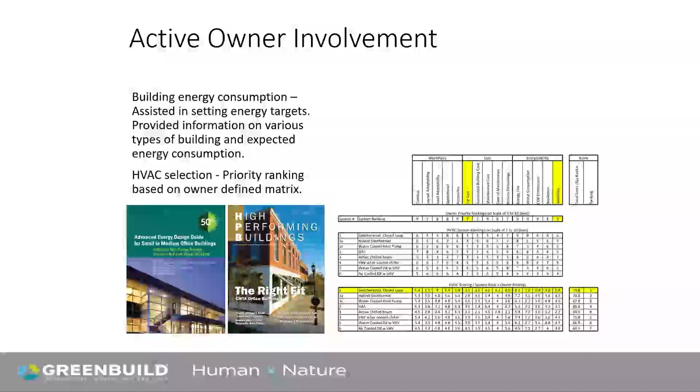This is, I think, where they're coming next. They're looking at more of the methodologies for managing the building, IoT, Internet of Things, that is, the smart building. There's opportunities too, in partnership with many of their research organizations, looking at microgrids, but also identifying ways to capture waste energy. That's more to come.

But the idea is this organization still partners with us, partners with the consultants and others to see how they can optimize this building.

And I think at that stage, we're really out of time, so I'll wrap it up. Again, a great client, just like you've heard from my colleagues, Tim and his assessment of operational computational analytics, looking at energy, looking at the climate, it all works together early in the process to get a project that the client shows off as both a net zero sustainable project, but also a resilient project.

So with that, my end.

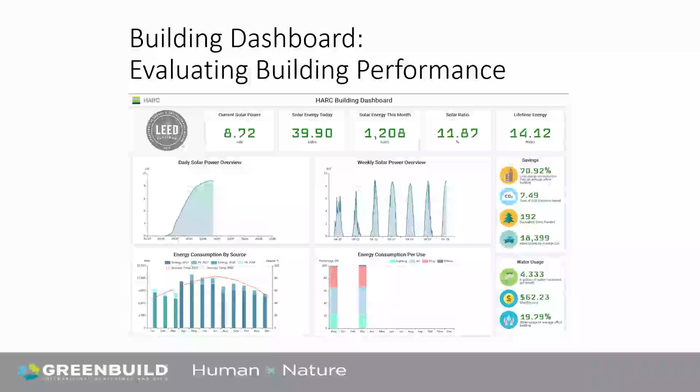First of all, I'd like to ask this question for everyone on the panel. Do most, and I mean most, like 70% or more of your clients understand the concepts of shelter in place, passive survivability, and operations continuity? And if they do, do they typically ask you to design projects to provide these features?

So I'm going to just jump in and go to Sammy first. I would say the way our clients understand that is different place to place. They may understand the terms, but the way they approach it is very different.

When we have a healthcare client, shelter in place is pretty much required, right? So in case something bad happens, they have to be able to do that by code, by FGI, by ICRA, all those kinds of things. And I think when it comes to the design, sometimes they expect that.

With resilience, sometimes you'll see that they expect these types of things to be included in the project. But other times you look at a hotel or commercial building, and the whole premise changes. Like an office building, if something bad happens, everyone goes home, that's it. So the spectrum of how we approach that changes from project to project.